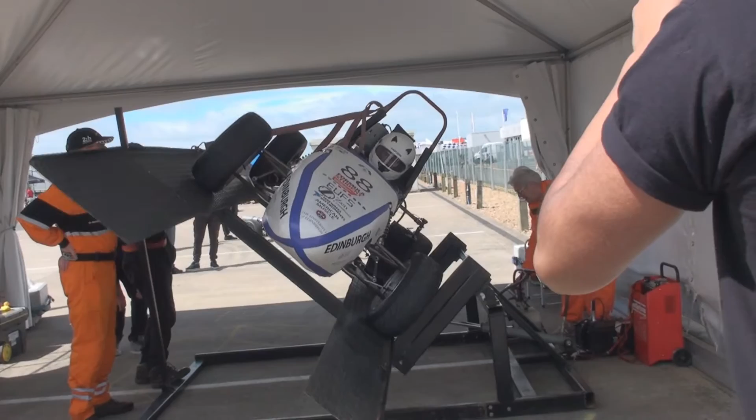But we were, at the end of the week, awarded as the team that most embodies the spirit of Formula Student, which was quite meaningful to us.

This season, our primary goal is to compete in all racing events at the competition, something which fewer than half of all the teams manage each year.

Today, there are 50 plus undergraduates working on the team, from a variety of academic backgrounds in many different countries. It's great as an engineer to work on such a broad and hands-on project within such a diverse environment. It really puts things into perspective.

For my master's project, I jumped on board with the Formula Student team, building a dynamometer. I've opted for a hydraulic engine dynamometer, and the goal is to design and then assemble it, for engine testing for the team.

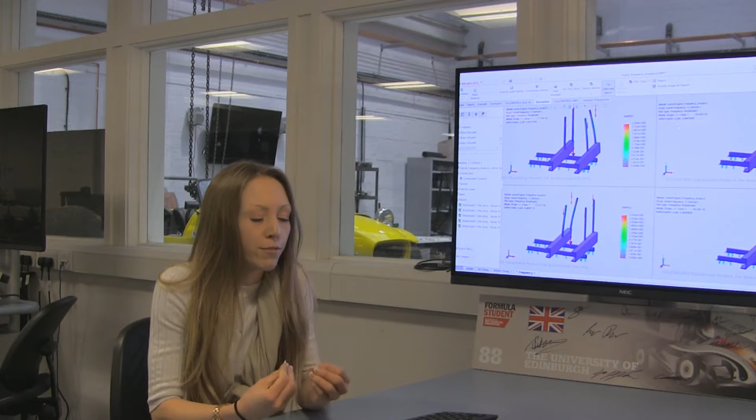So I want something physical, something tangible that will be useful. Useful because it's amazing to have engine data and prove you've done testing and you've been thorough, you've built something from the ground up.

And I'm doing my final year project with another student, and we're manufacturing this carbon fibre nose cone, which is also the crash absorbing structure for the car. It's been really nice. We've got a hold of some carbon fibre and we're just about to get into the manufacturing phase, which is cool.

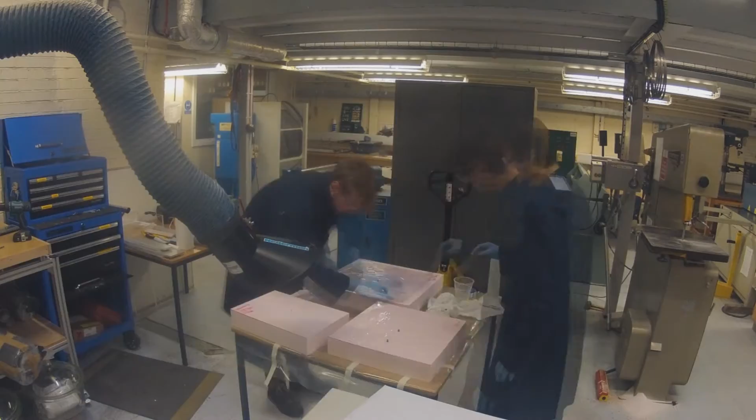I've never had the chance to deal with carbon fibre before. Making things in carbon fibre is famously expensive. And although we're lucky enough to get materials like carbon fibre and our mould tooling block for free from sponsors, we still have to cover the costs of delivery of all these different things, which actually ends up being quite expensive.

Last year the biggest challenge we had was to get the engine running. We had a 20-year-old crashed motorbike engine, so the task looked simple.

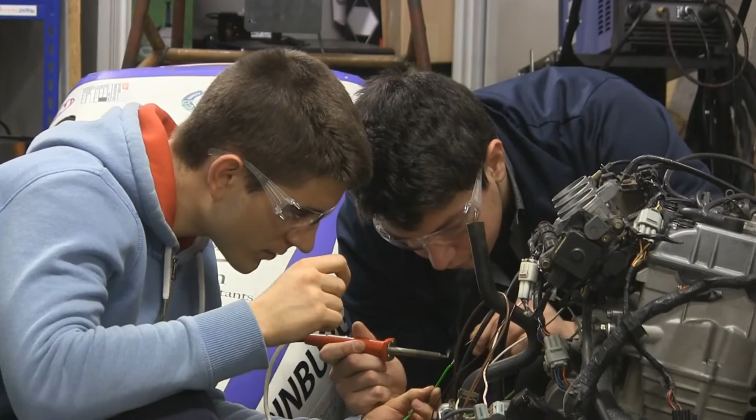And this year I wanted the ECU to perform in a very distinctive way, and that's why I needed some more funding to buy the best performing ECU.

The extra funding from the Vision Engineering Fund is really going to help us this year, because we're going to put some of that money towards building a jigging and testing table for the chassis. So we can manufacture a chassis that's dimensionally accurate and the same as our model that we use to design all of our other subsystems, like the suspension package and the aero package, for example.

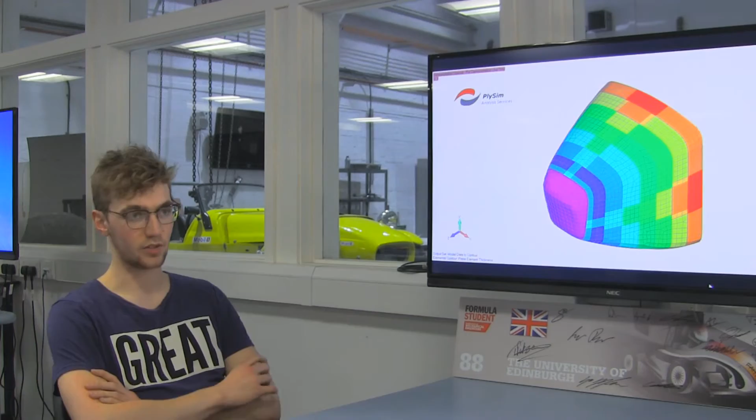The funds from the Vision Engineering Fund have allowed us to pay to bring these materials to the department and allowed us to use them. It goes without saying that without those materials, this project wouldn't be going anywhere. It would be almost impossible, and obviously the quality of the components you get influences how good it is.

So if you have a shot to build something and you have absolutely nothing, you're starting from scratch. Yes, sourcing it, you need the budget, absolutely, otherwise it wouldn't happen.

Personally, I found that the biggest learning curve for me within this team has been people skills, how to come to a meeting and give a presentation and talk to people, that sometimes even if you're having maybe not the greatest day, you still have to conduct yourself in a professional kind of manner and get on with everybody well. But I've enjoyed that part of it very much so.

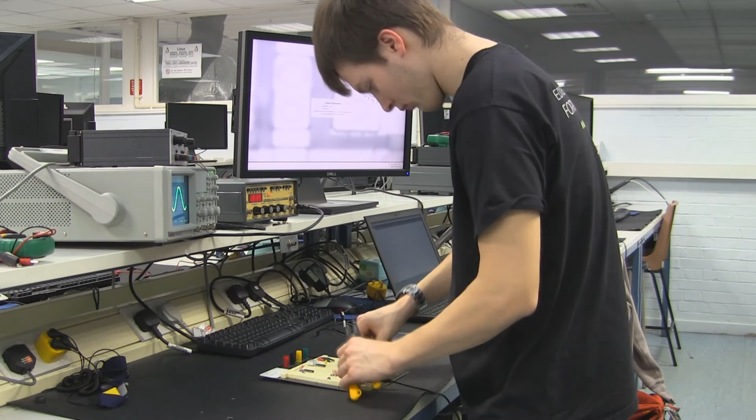Most interesting for electronics would be designing all the circuitry and all the stuff we do from scratch. You can design it however you like. That was pretty cool.

The best aspect for me, as regards Formula Student, is the mixture of things that it brings. It's academically demanding, but I also have much fun working with it.

My course has been made so much easier after being in this process. I've had a design report that without some of the techniques I've learned from Formula Student, I wouldn't have been able to do.

And there's also so much to do on the business side. Looking for sponsorship is one of the big things that the business team does, but there's also costing - there's a whole costing presentation at the competition. So there's a huge space for economics as well in the team.

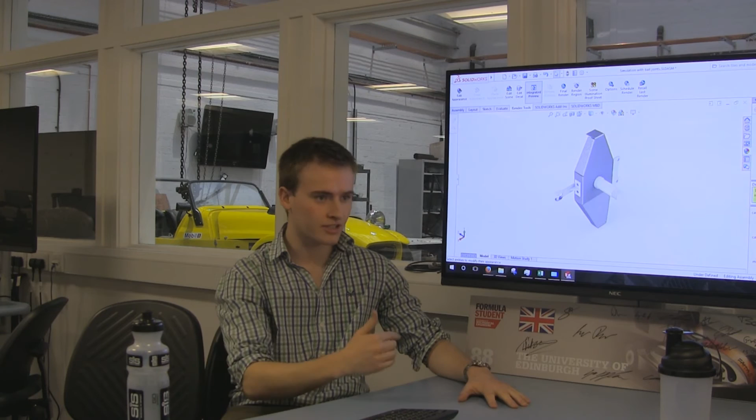In any industry, you're going to have problems. You're going to have to create solutions. And this shows you that if you do work hard and you keep trying and you keep thinking things through and starting again, you will eventually get to a good solution.

Just getting into a group and building a car, that's an amazing experience. You're not going to learn just by looking at notes.

Here at Edinburgh University Formula Student, we have a vision. That vision is to build a race car which is competitive in a global environment. Without funding, this vision would go no further.

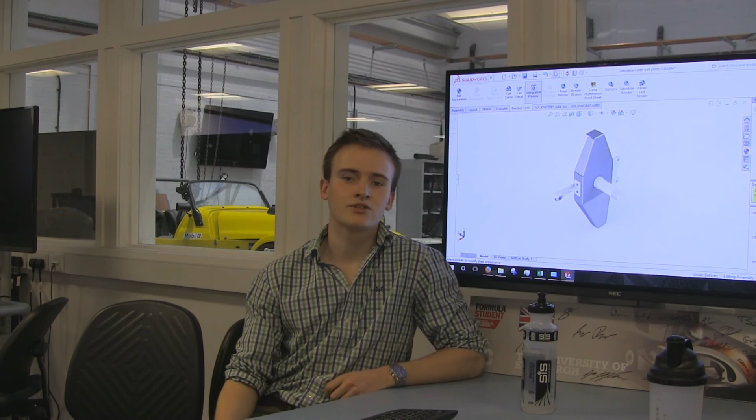So we'd like to thank the Vision of Engineering Fund for giving us the opportunity to build our vision into reality. All we can hope to do in return is to make you feel that your investment was worthwhile. And that's exactly what we hope to do at the competition in July.